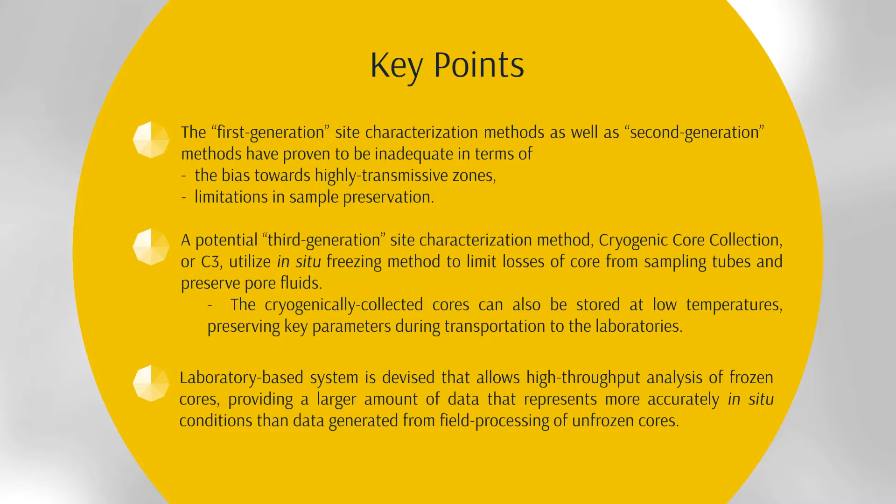And now this technique was developed and optimized over the last decade through several SERDP and ESTCP projects. Chuck, how about you put on your historian's hat and give us a short tour of the history? Sure. Now, the work started with Dr. Rick Johnson's SERDP project ER-1559 back in 2007, where the idea of cryogenic coring was tested out first in the lab and then in the field. The idea proved feasible and easy to integrate into routine field sampling.

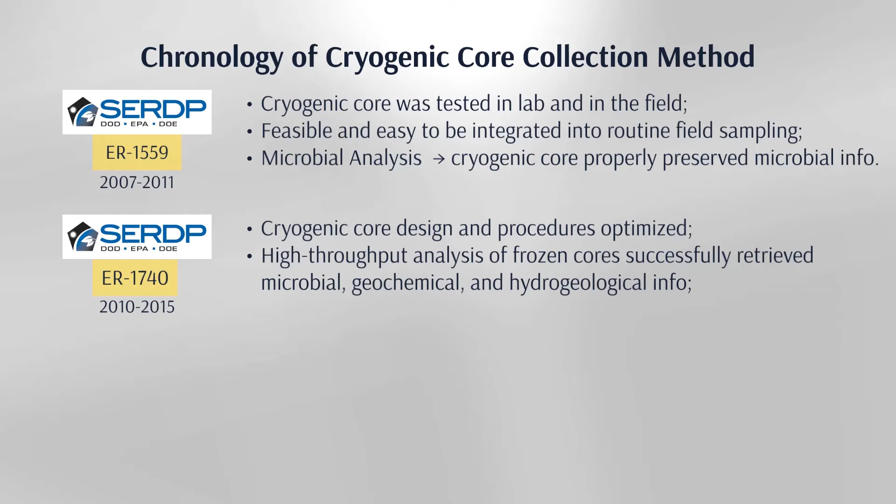Then SERDP project ER-1740 followed and built upon these preliminary positive experiments with more development work in the field and the lab. Then this SERDP project led to ESTCP project ER-201587, where further enhancement and testing was performed at a remediation site. The research team relied upon cryogenic core collection as a major site investigation tool to better understand the actual performance of remediation technology in the source zone and evaluate if rebound of groundwater concentrations might occur in the future. Okay, so we've got this series of projects.

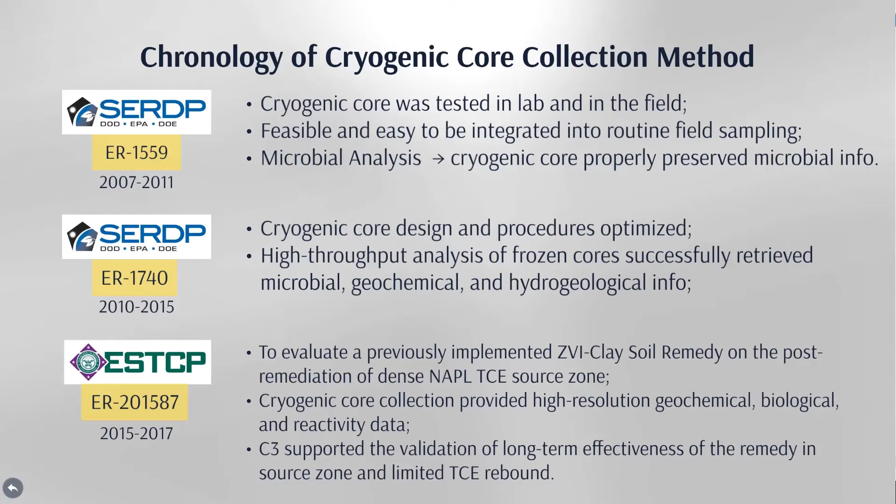Today we're going to focus on one of the projects, ER-1740. It was called a State of the Science Review of Management of Contaminants Stored in Low Permeability Zones. The SERDP project was led by Dr. Tom Sale from Colorado State University, along with PIs Dr. Rick Johnson from Oregon Health and Science University and Mr. Rick Rogers, Drilling Engineers Incorporated.

Now, Dave, the term cryogenic coring implies in-situ freezing. So does that basically mean what we're doing is to pull a popsicle out of the subsurface and thaw it out for more information? Great analogy to start. Maybe a little bit more technically complex than that. Okay, well, let's get into the technical nuts and bolts of cryogenic coring. How about you start with a problem statement from this SERDP project?

Okay, the researchers had a vision to improve the way we collect data from the subsurface. As many practitioners in the remediation industry know, what we're typically doing is grabbing samples from monitoring wells and soil cores. We refer to these generally as first-generation site characterization methods. There are more advanced techniques, which we might call second-generation characterization methods. That's things like the membrane interface probe, MIP, Waterloo profiler, and hydraulic profiling tool.

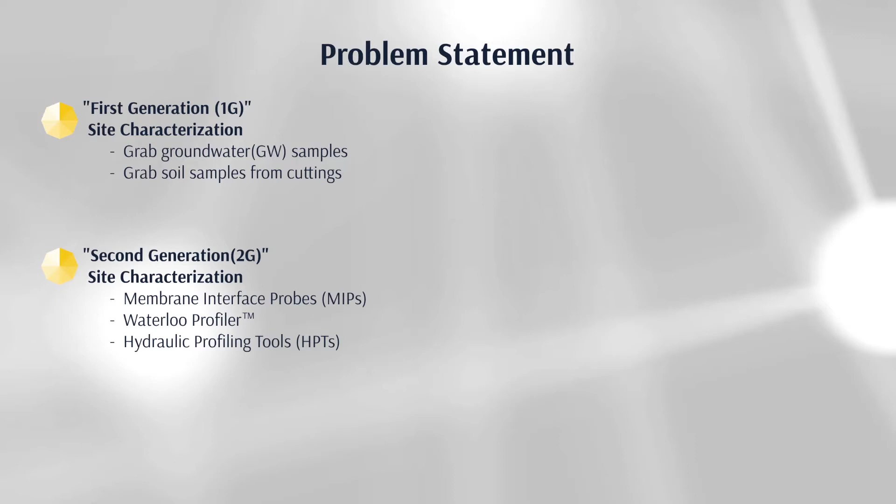However, these first and second generation methods do have some limitations as well. For example, 1G monitoring well methods only capture the water from transmissive zones, and the water sample is often a mixture of water from different depths, causing mistakes in characterizing the plume structure, and it results in a conceptual model that may not be accurate.

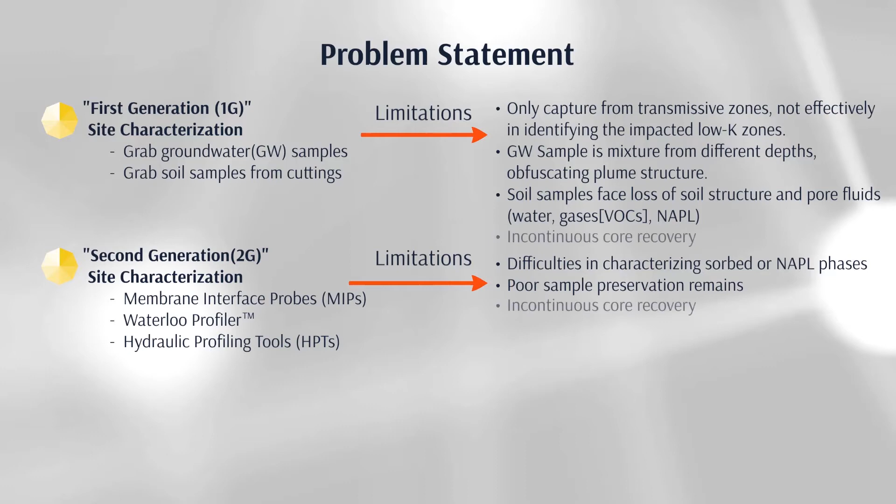On the soil side, soil samples collected from exposed cores are subject to loss of volatile compounds. You lose the soil structure, and sometimes you miss the NAPL. And the 2G tools are better, but they still have some difficulties in characterizing sorbed phase or NAPL in soil, and often some of the core sample isn't captured and it's lost. Okay, Dave, well, if we're trying to solve an engineering problem or find a better solution, sometimes you want to assume what is the ideal situation, the ideal solution.

So here's a question for you, Dave. In a perfect world, what do you think a site characterization sampler should be capable of doing? Good question, Chuck. The simple answer is that a good sampler should tell us exactly what the subsurface soil and groundwater looks like. More specifically, you want to have a good recovery of the core, meaning that the length of the collected core should be as close to the depth which the sample tube is advanced as possible.

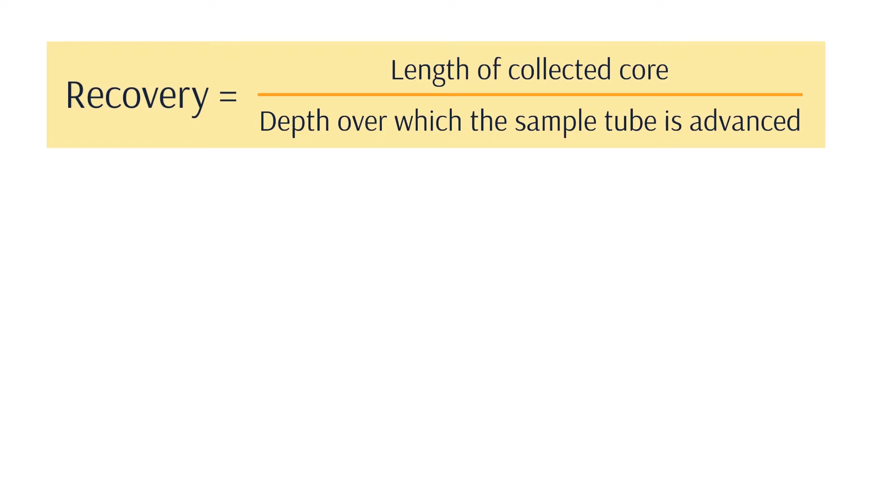Example of a less than satisfactory recovery is the occurrence when you're in maybe flowing sands in saturated media, which means that the loose sand falling off the core is causing a lower pressure than the adjacent formation. And that in turn is going to push sand outside of the borehole into the core sample, making it pretty hard to identify the formation and the plume structure. And that's shown in the graphic here.

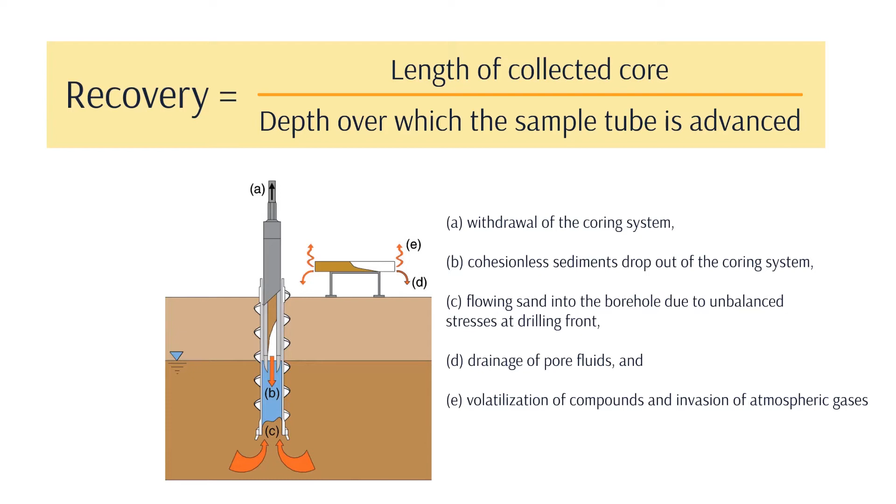Well, that makes sense. So desirable attribute number one, good core recovery. Anything else? Well, you'd also hope for a good preservation. You're taking the core sample out of the ground, but that's really just the first and sort of superficial step of site characterization. We also have to take that core back to the lab and analyze it inch by inch to find out some things about the soil properties, like the porosity, the clay content, also what compounds are present, what concentrations, and what form.

Are they reduced or oxidized? Then you've got pore water or NAPL or sorbed compounds, other things to worry about. Maybe you're also interested in the microbial ecology. But if you're cutting that core open and putting it into soil jars, then you've got the opportunity for bad things to happen. The air can cause redox conditions in the core to change. Gases can be lost. Microorganisms can die. And maybe you're losing NAPL or water.

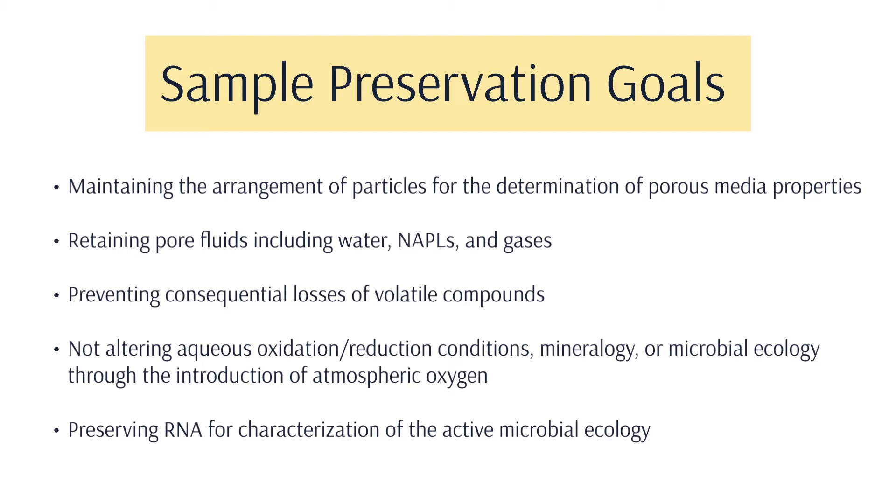So basically, we want everything within that core to remain in a pristine state on its way to the lab, and good sample preservation is the key to that. Okay, so that's desirable attribute number 2, good preservation. The good news is that this third-generation cryogenic core collection technique, developed and tested in this SERDP project, is proven to greatly improve the recovery and improve the core preservation for the trip back to the lab. So in other words, it's 2 for 2 on our wish list. All right. Well, let's see how it works.

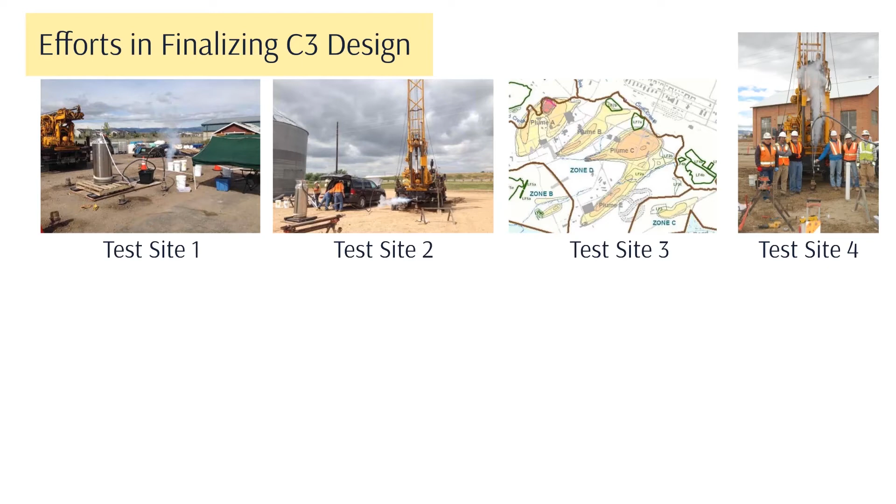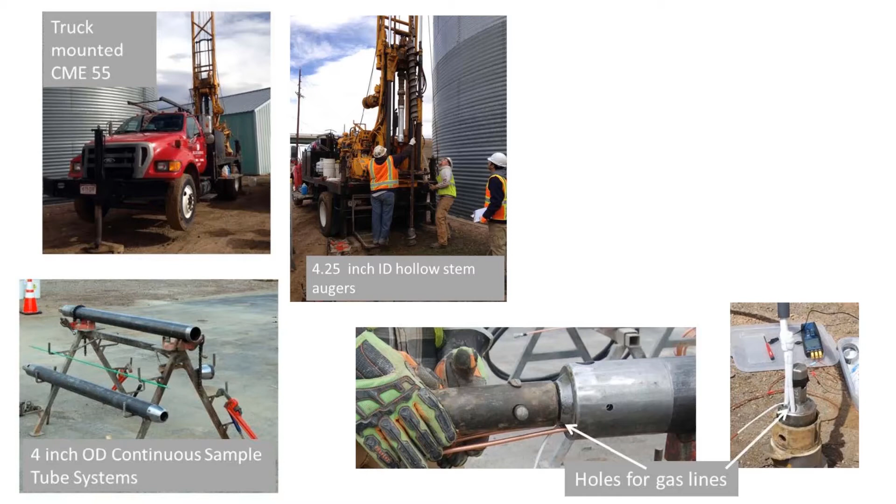Well, first, I want to note at this point the cryogenic coring research team has gone out to multiple field locations, and they've tested different assemblies of samplers and protocols prior to finalizing 2 different C3 systems. The team was modifying conventional hollow stem auger to allow liquid nitrogen, that's the freezing agent, to flow down around the core to freeze it. They modified the drive shoe to allow the use of sample liners with a 2.5-inch outer diameter so that there's sufficient clearance in the core barrel for the cooling assembly and the insulation.

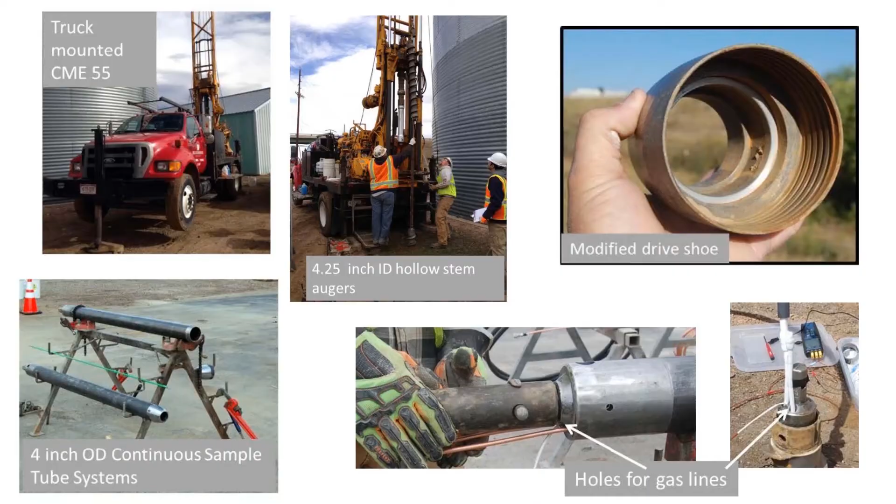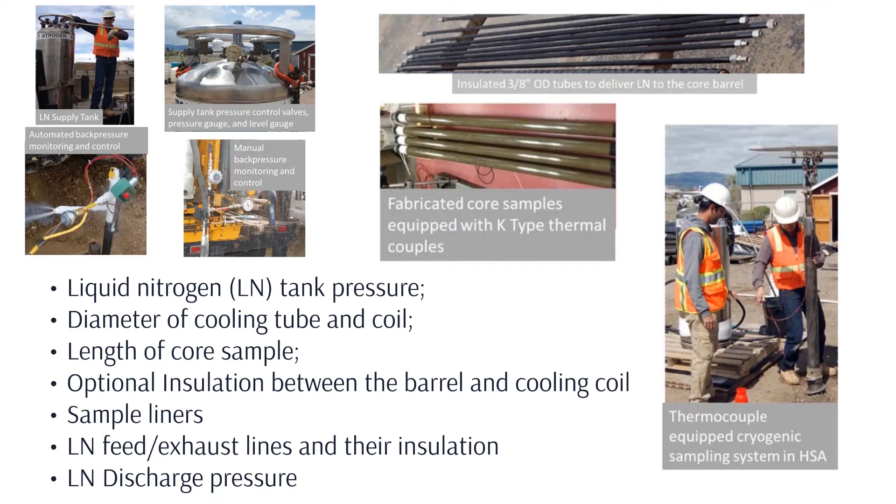So moreover, the liquid nitrogen pressure, the proper diameter of the cooling tube and cooling coil, that's where that liquid nitrogen travels, the feasible length of the core sample, options for insulation between the barrel and the cooling coil, material for the sample liners, and many other important parameters were tested as part of this research. And then the researchers were also evaluating things like improving the recovery, as we were discussing earlier, controlling flowing sands from mixing with the sample.

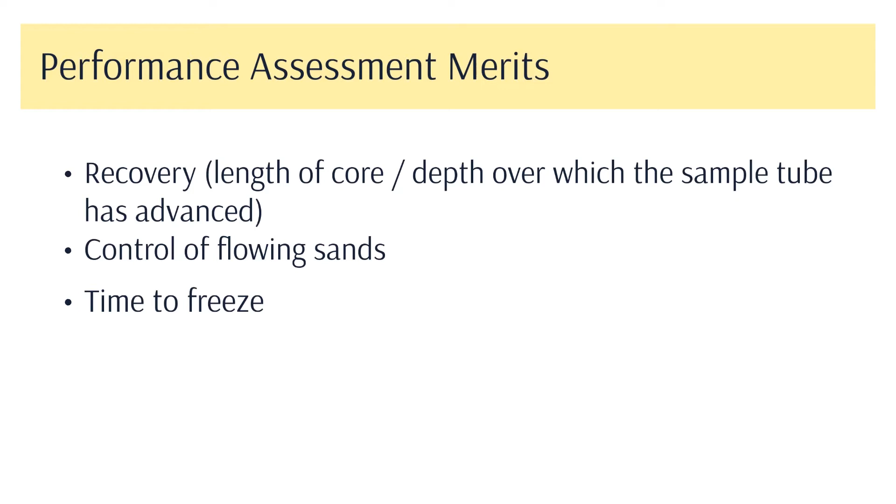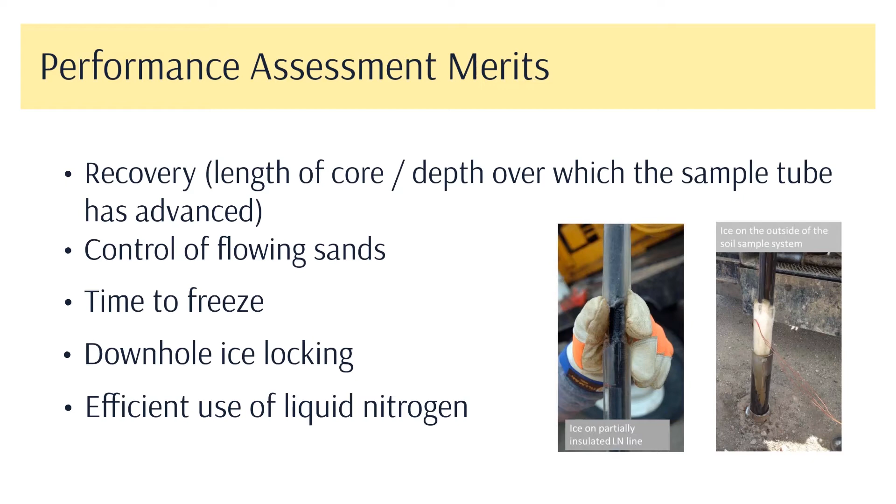They want to have a short enough freezing time, but not requiring too large of a liquid nitrogen supply. They want to reduce the probability of downhole ice locking. So these are all factors that they're trying to weigh in that final design. So quite a list of things have been evaluated. So let's show this final design, which is really 2 different parts. All right. So 2 different systems were recommended for in situ freezing of the sample core.

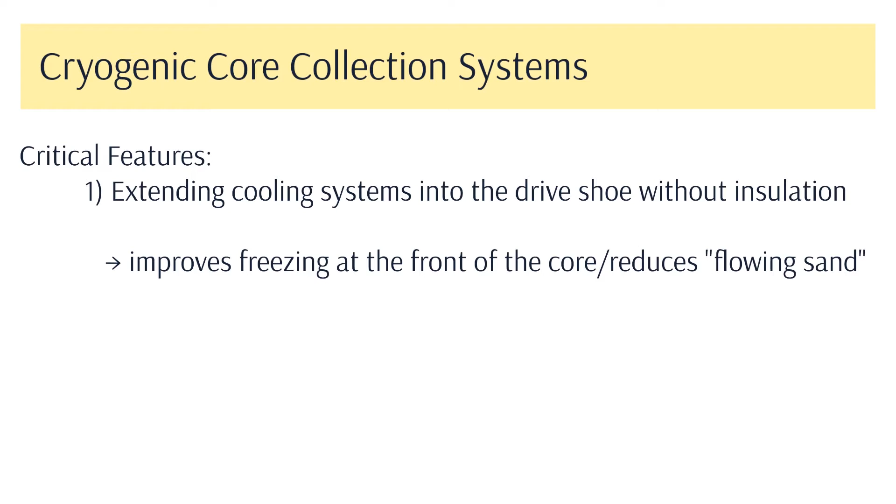But the critical features of both systems included, number 1, extending the cooling system into the drive shoe without insulation, which improved freezing at the front of the core and also reduced the effects of flowing sands by freezing ahead of the drive shoe. And feature number 2 is adding insulation around the remaining sections of the cooling coils in the cylinder, and that's critical for rapid freezing and limited downhole ice locking.

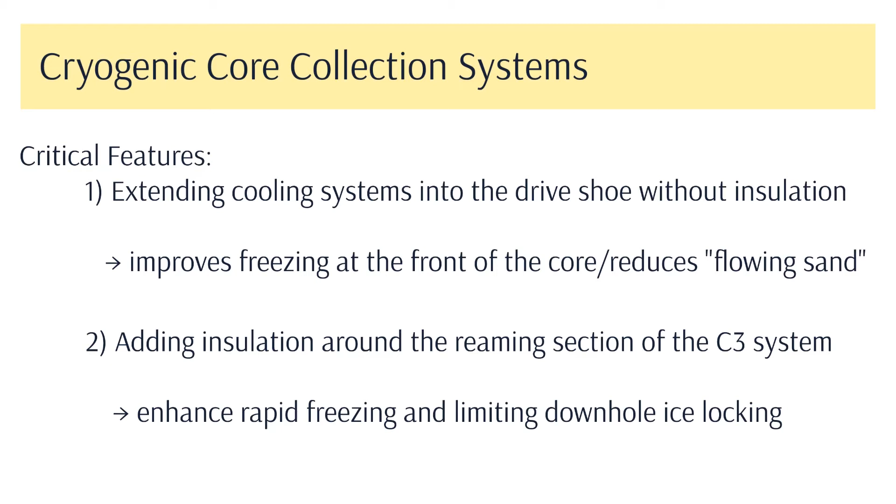The best cooling agent turned out to be liquid nitrogen. It has a low exhaust temperature, sufficient cooling capacity for a full day's worth of coring, and it's also reasonably priced and widely available.

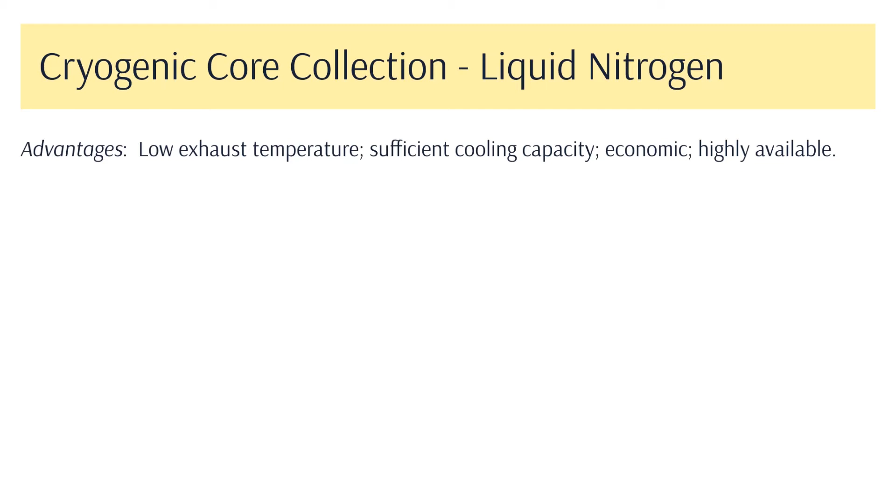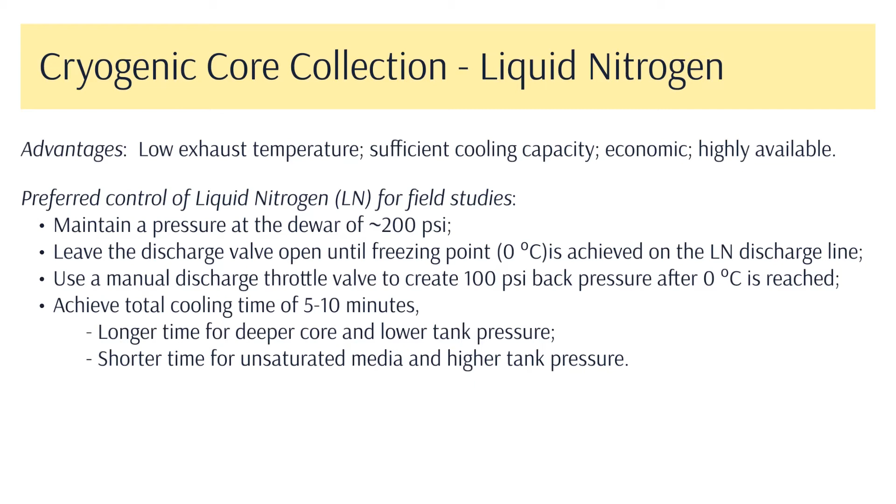Now, the delivery of that liquid nitrogen is the key to successful in situ freezing. Here's a list of steps serving as a guideline that you potential popsicle makers out there need to follow. We've got a nice video here, recorded by drilling engineers to give a good practical perspective.

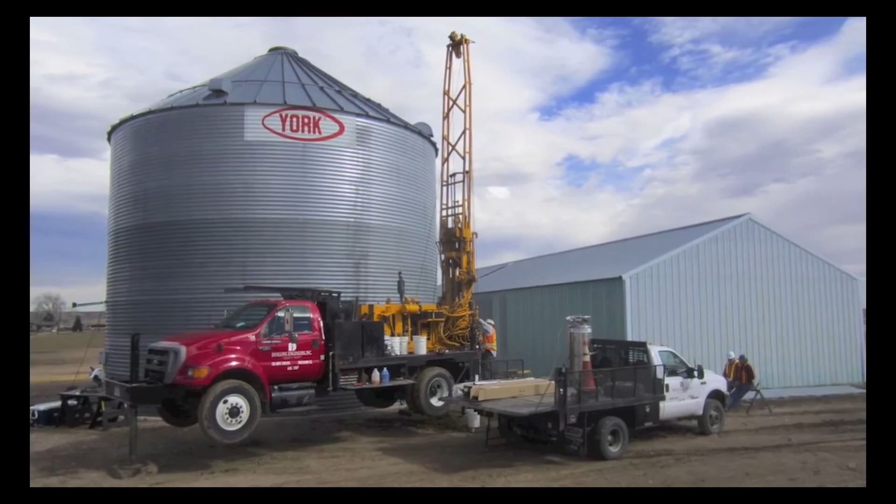Cryogenic coring is an exciting new way to collect samples of soils from the subsurface settings. It has advantages with respect to controlling flowing sands and recovery and preservation of samples.

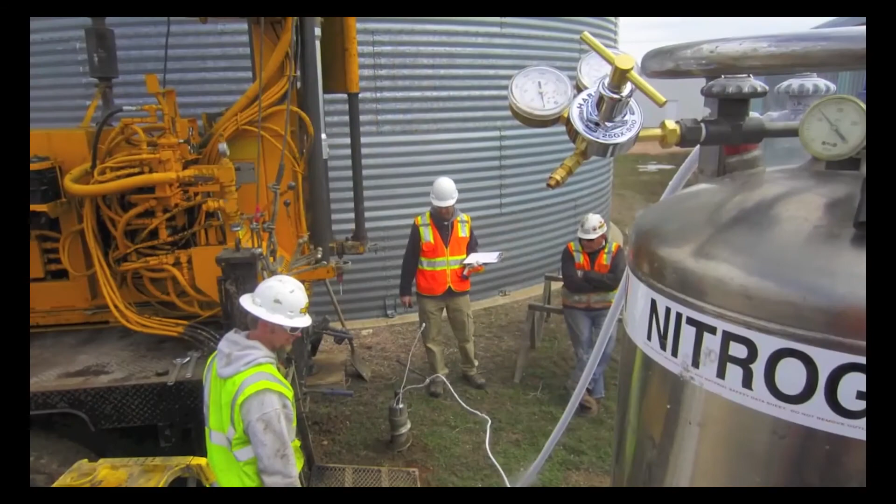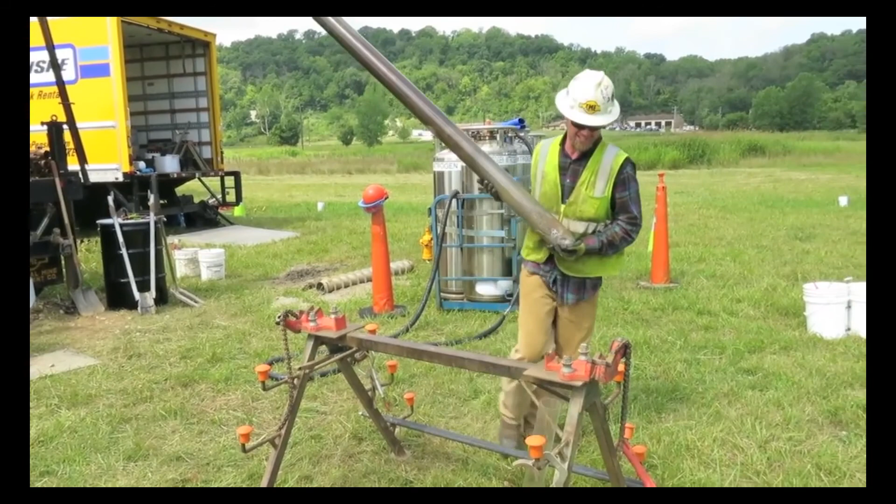The cryogenic core collection involves advancing the hollow stem auger and the C3 barrel, filling the barrel with a sample, injection of liquid nitrogen through the C3 system to freeze the core and the formation immediately below the drive shoe, withdrawal of the cryogenic core collection system and sample from the hole, and finally the hollow stem auger and the C3 barrel are advanced for the next sample interval.

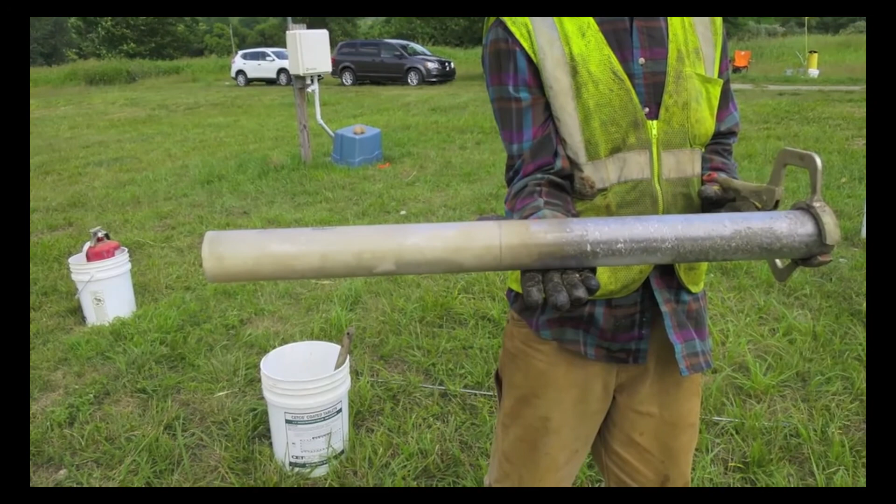Collected cores are placed on dry ice in the field and shipped to a laboratory for analysis. Cryogenic coring is going to be a big part of our future of collecting subsurface soil samples.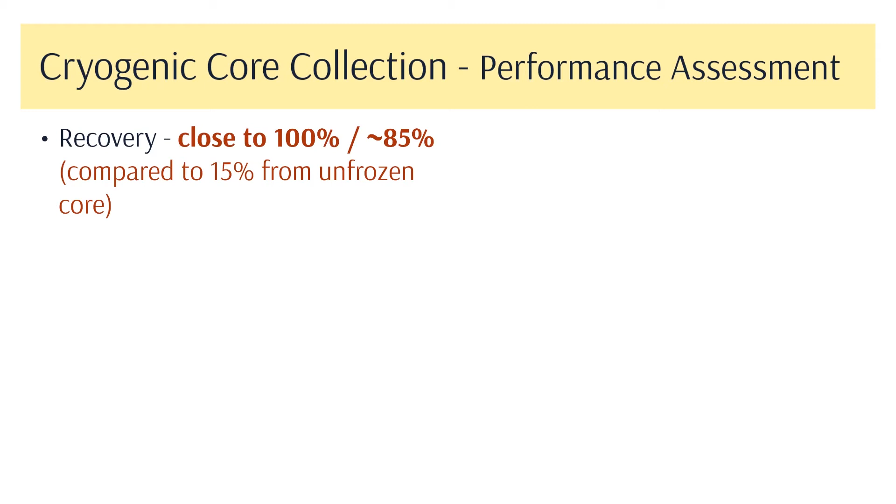The time to freeze was drastically shortened after optimizing the cooling coils, shown in the figure here, where the red optimized system lowered the temperature from 33 to negative 30 degrees in just about 10 minutes or so. Also, there was no downhole ice locking encountered during the field work.

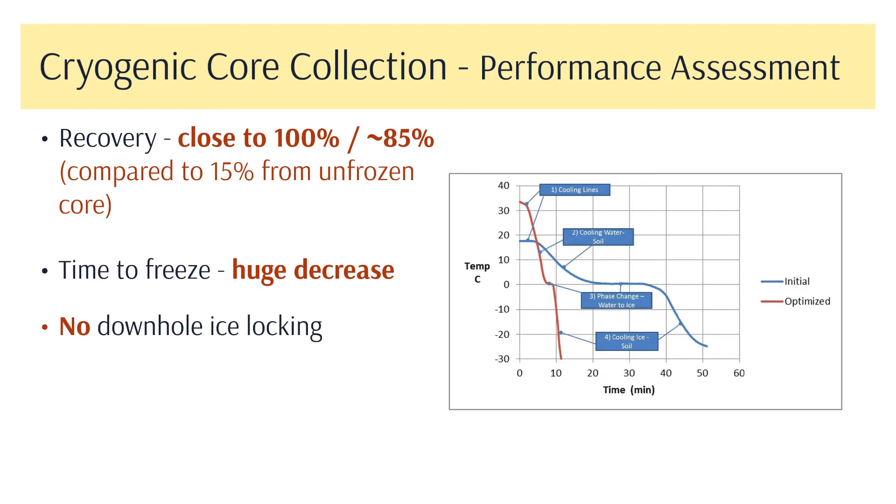Once you've got the cores to the depth specified in your work plan, you put the cores on dry ice in the cooler and ship them back to the lab for analysis. So you end up with a cooler full of these frozen cores, with all that key, hard-to-get information just sitting there ready for the lab work.

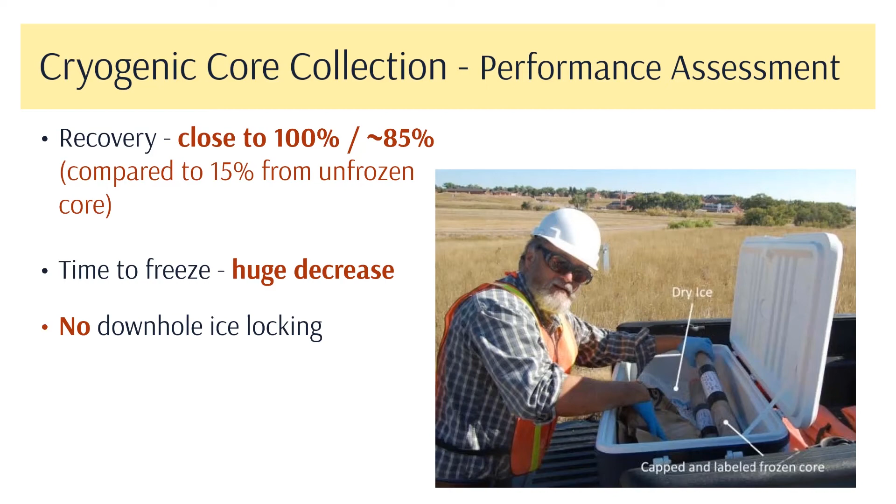That's pretty awesome. So let's take a look at how the hidden data is revealed through analysis of the core samples. Now, the parameters that the project team was interested in, and all site investigators are interested in, include the contaminants, dissolved gases, redox conditions, mineralogy, microbial ecology, and the hydraulic properties.

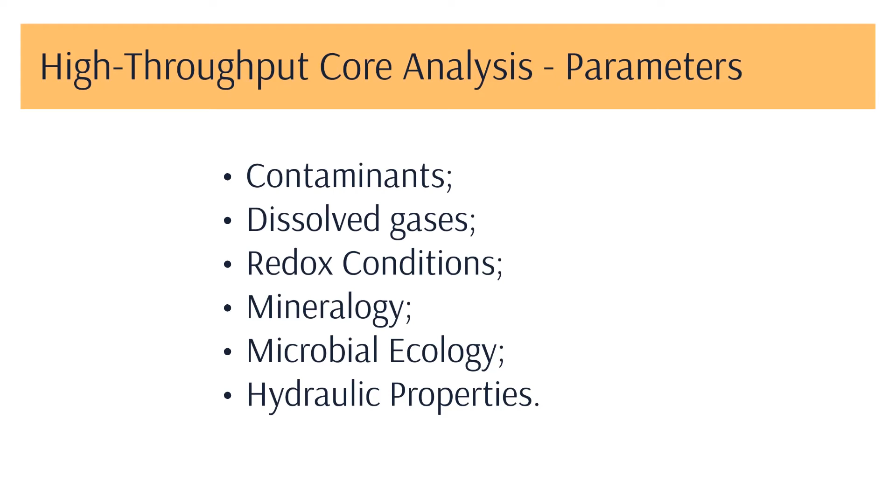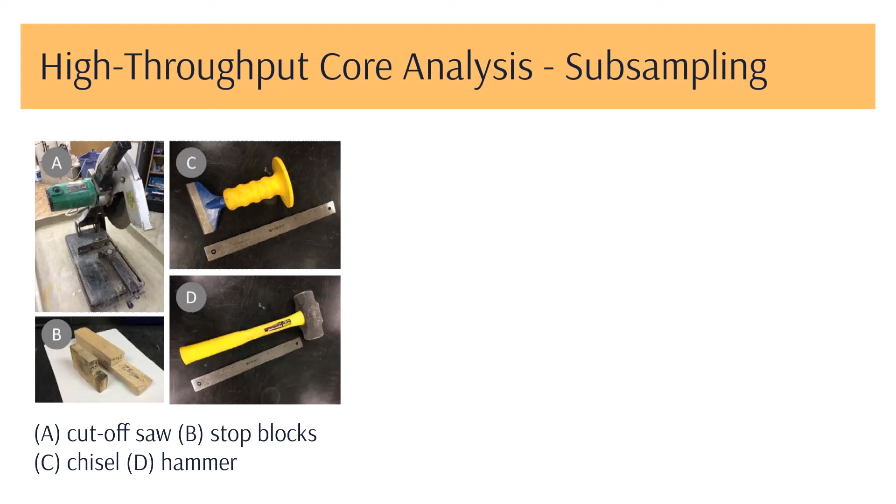All this processing was performed in a fume hood. Now you see that the researcher in the photo has proper safety gear, including these noise-canceling headphones. Good job in the safety plan.

Now he's cutting the cores into smaller cylindrical discs using that cutoff saw shown here on the left. In general, a 1-inch thick disc was collected every 4 inches of the core. You can see a typical sampling pattern in this diagram here, based on where you get 7 1-inch thick sample discs, A through G. Note that everything was done as fast as possible to minimize the thawing of the core.

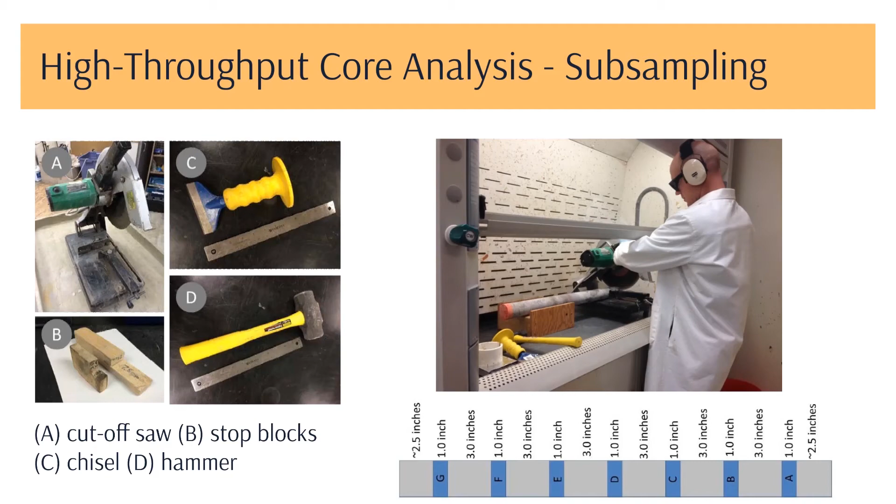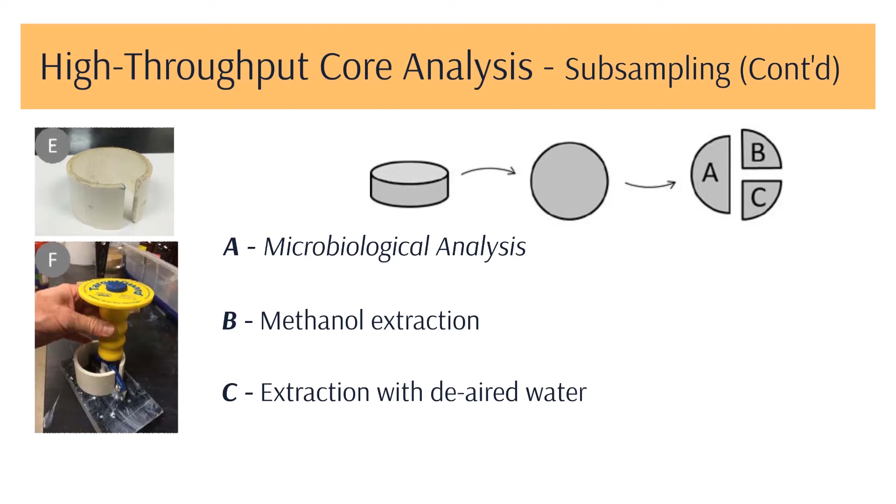Let's take a look at the data collected from these cryogenic cores for 3 different holes drilled to install monitoring wells. The best way to see what you get is to look at the concentrations of the chemical compounds along with the geologic cross-sections. So here we go. The first data figure shows what's going on in monitoring well MW38C at one of the field sites.

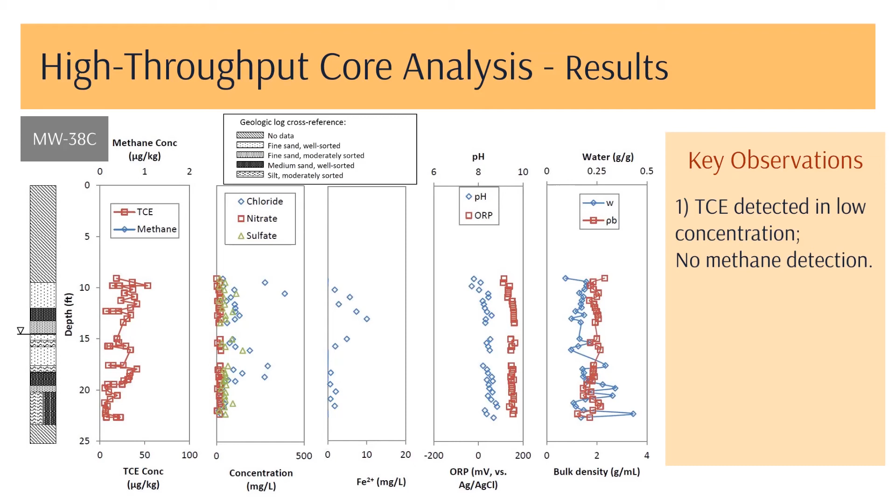The inset here includes the legend for the cross-section. The key points are: first, TCE was detected in low concentration overall, and no methane was detected at all. Second, there didn't appear to be a clear correlation at this site between TCE and the soil type.

Not very exciting. But one point of interest is that the redox, reduction oxidation potential, in this well was higher than those at two nearby wells.

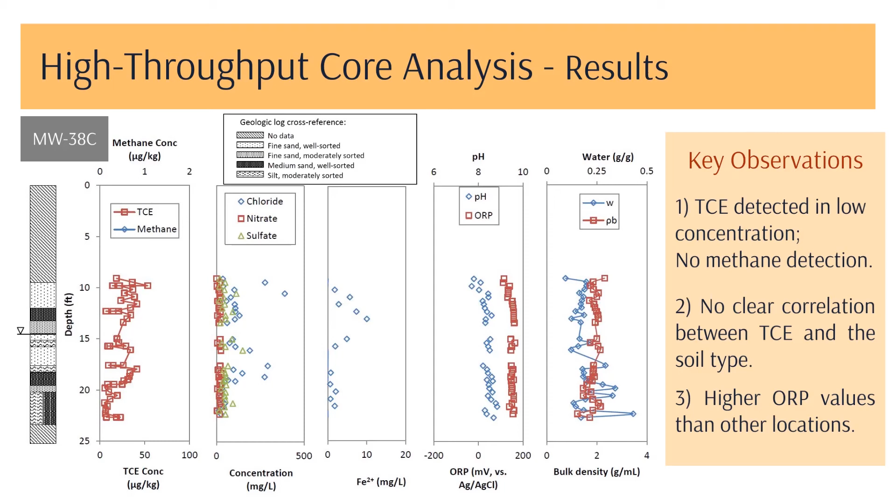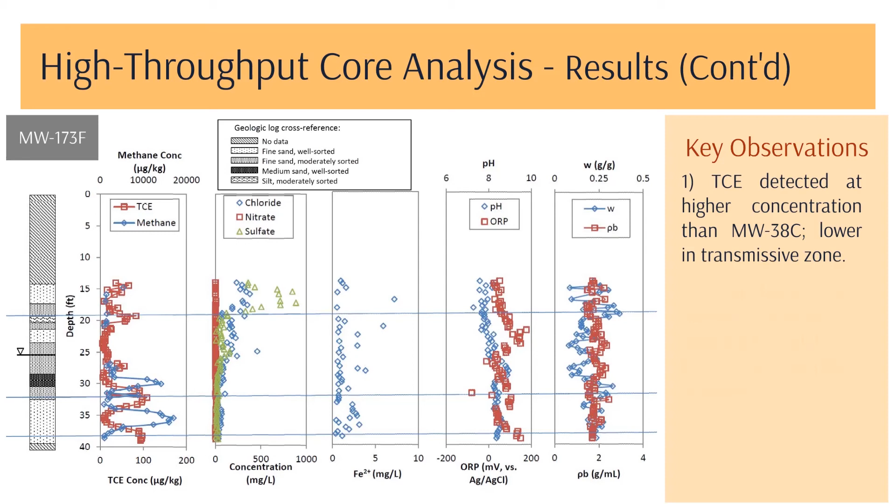Here are the results from another monitoring well, MW173F. In this well, TCE was detected at a higher concentration. Methane was also observed in the transmissive zones, related to the injection of lactate near the well in the late 2000s. Now, if we look again at the TCE concentrations, we notice that TCE was generally lower

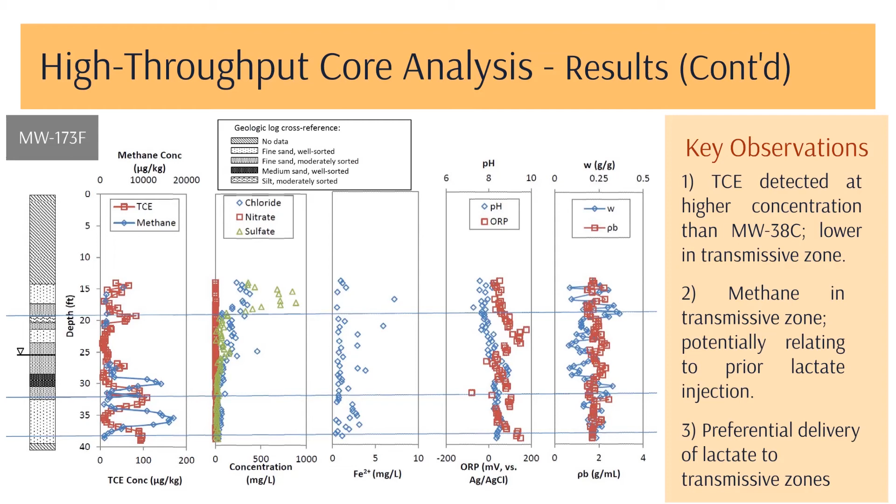in the transmissive zones compared to the low K zones. And this observation really reflects preferential delivery of lactate to the transmissive zones for treatment.

Now, the last figure shows the characterization results of well 700C. The geologic log here was less complex than the previous two wells, with a continuous transmissive zone at around 14 to 17 feet below ground surface.

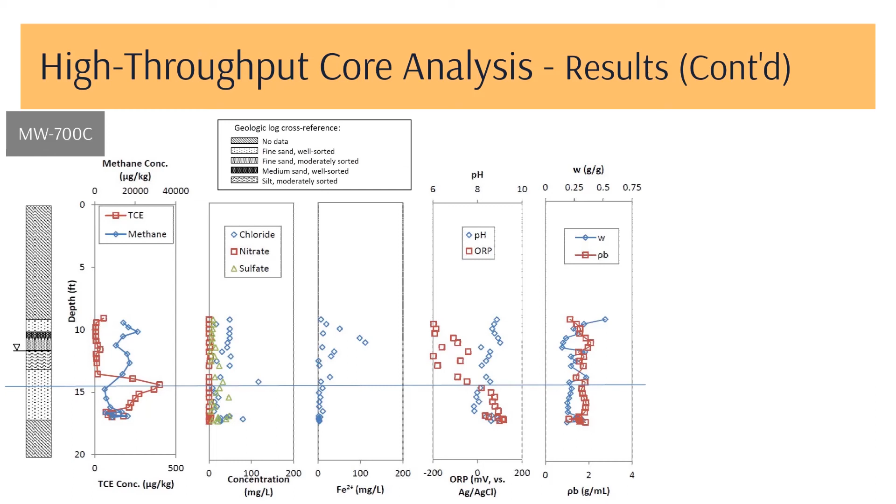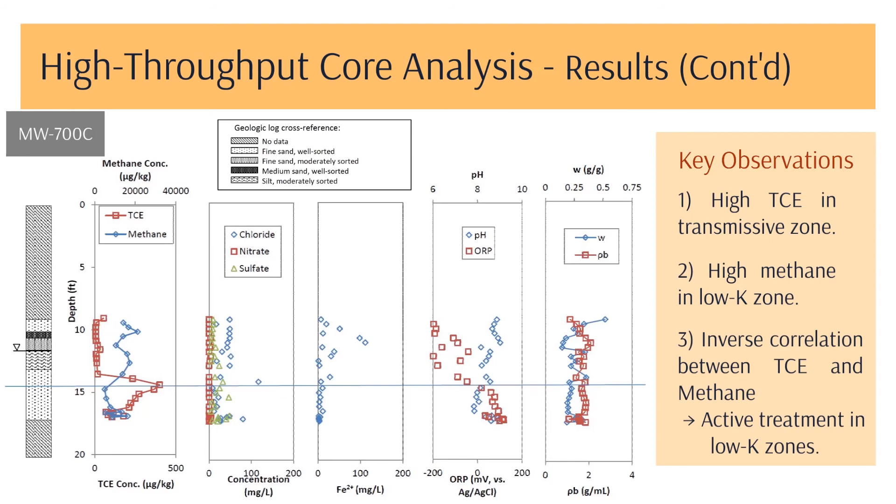Within this transmissive zone, we observed high concentrations of TCE, while high concentrations of methane were seen in the low permeability, or low K, zone. These observations revealed an inverse correlation between methane and TCE, suggesting active ongoing treatment was occurring in those low permeability zones.

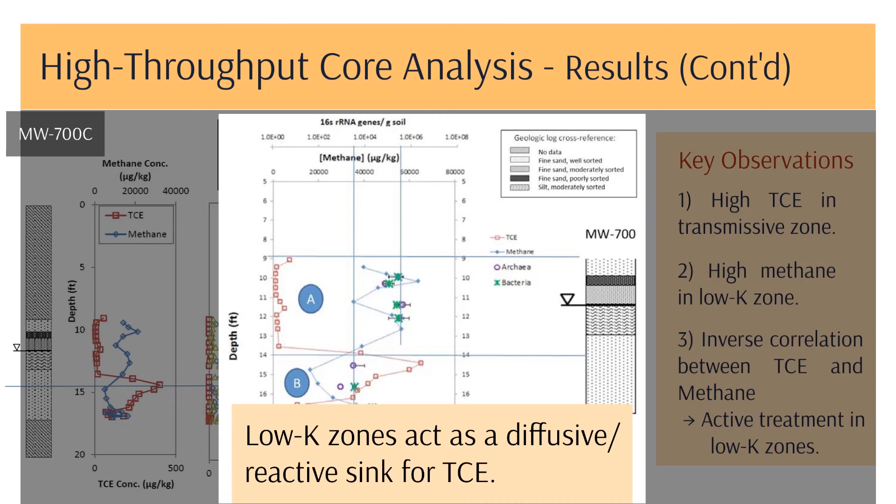Another important finding based on these results is that the low K zones were potentially acting as a diffusive reactive sink for TCE. So the C3 method proved to provide much more detailed and more reliable data than the conventional methods, especially the depth-specific concentrations and the ability to relate these chemical analytical results to geologic logging results.

The overall analytical process, however, is somewhat labor-intensive, and these nicely frozen popsicle-like cores do get destroyed when they're analyzed.

Dave, if there's only some way of, say, X-raying the core to get this important information without having to cut it all up, that would be really neat. Well, that's a good idea, Chuck.

The project team actually did test several frozen core scanning methods on lab-synthesized cores to find out what their alternatives might be. The idea was to identify the compositions within the core, meaning the locations of the major phases—air, water, soil, and NAPL—and then use these compositional data to guide the subsampling process.

Well, cool. What'd they find out? Here are some of the potential options. Notice that these are all candidate technologies, but they're actually medical scanning methods. Their results showed that magnetic resonance imaging, or MRI, was probably the best potential candidate for sensitive NAPL detection in the frozen core samples.

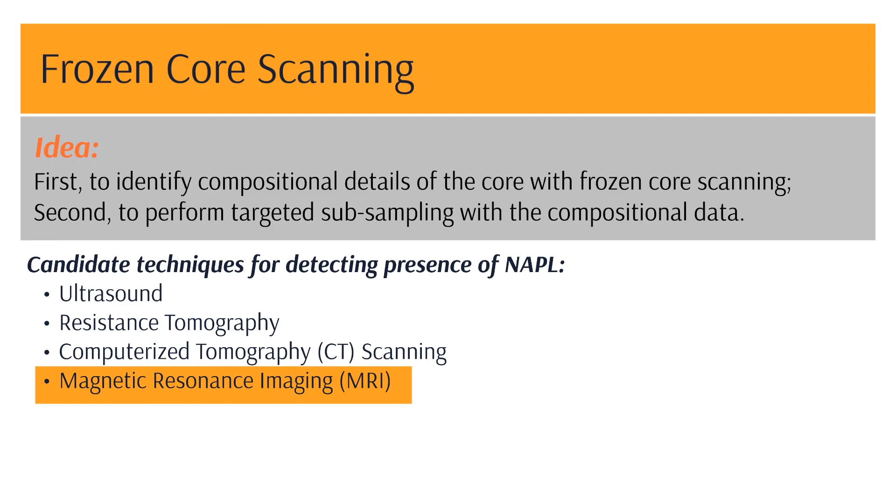Oh, really interesting. Well, now let's go through the key points once again before concluding today's short video. Sure. First, the first generation site characterization methods—conventional monitoring wells and subsurface grab samples—as well as the second generation methods, have problems in terms of bias towards highly transmissive zones, and limitations in the preservation of pore fluids, volatile compounds, redox conditions, and so forth.

The research team said we can do better if we freeze soil samples in the subsurface. This is called Cryogenic Core Collection, or C3, and it utilizes in situ freezing to limit losses of core from sampling tubes and to preserve pore fluids, including water, non-aqueous phase liquids, and gases.

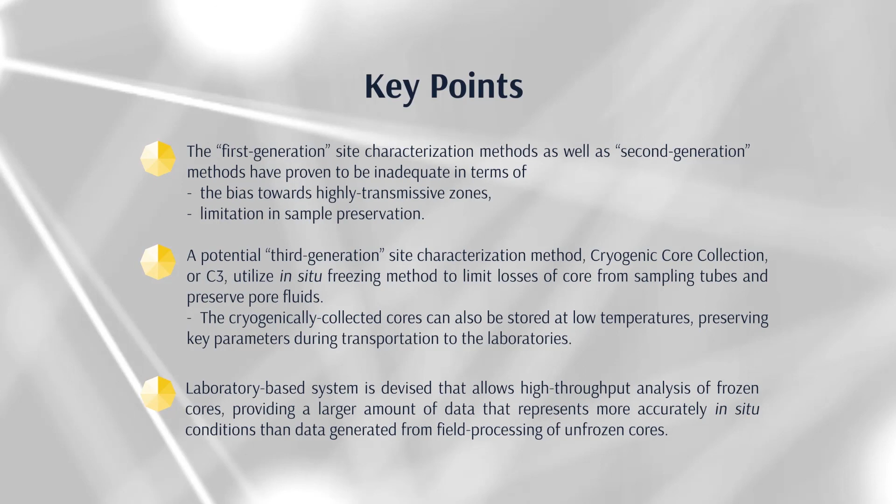Finally, a lab-based system that they developed allowed high-throughput analysis of frozen cores, providing a larger amount of data that represents more accurately those in situ conditions than the data generated from field processing of unfrozen cores.